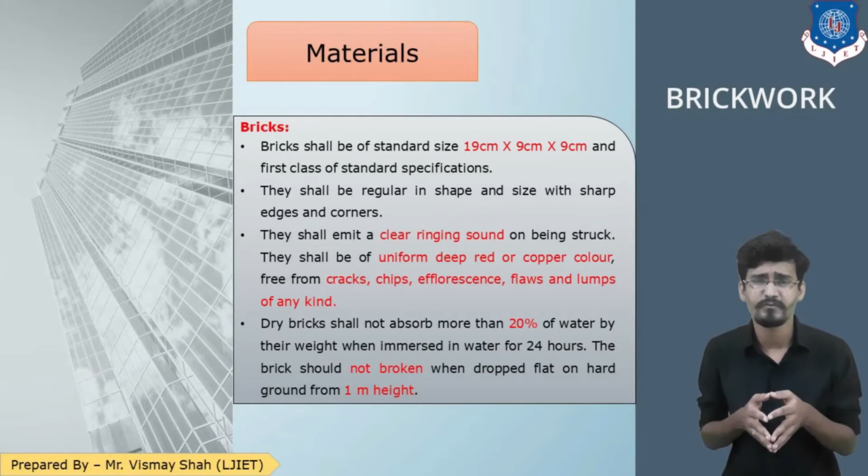The next material is cement. As we already discussed in reinforced cement concrete, the cement should conform to IS 269. It could be Portland cement, blast furnace slag cement, rapid hardening cement, and the general OPC cement should have a compressive strength of 17.5 N/mm². So that is about cement.

The next is fine aggregate. The fine aggregate shall conform to IS 383. It should be clean, sharp and hard angular grains passing through the IS sieve 4.75 mm. Also, it should be free from dirt, dust, vegetable and organic matter. Sea sand shall not be used; instead, river and pit sand shall be used. So that is about cement and sand.

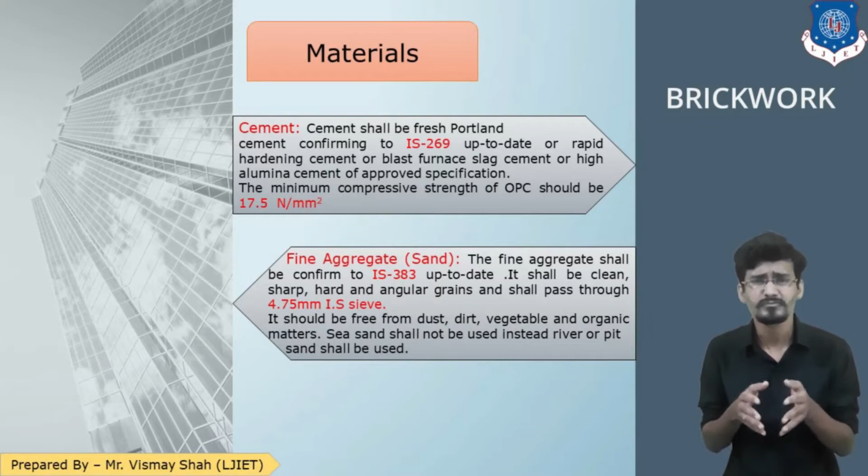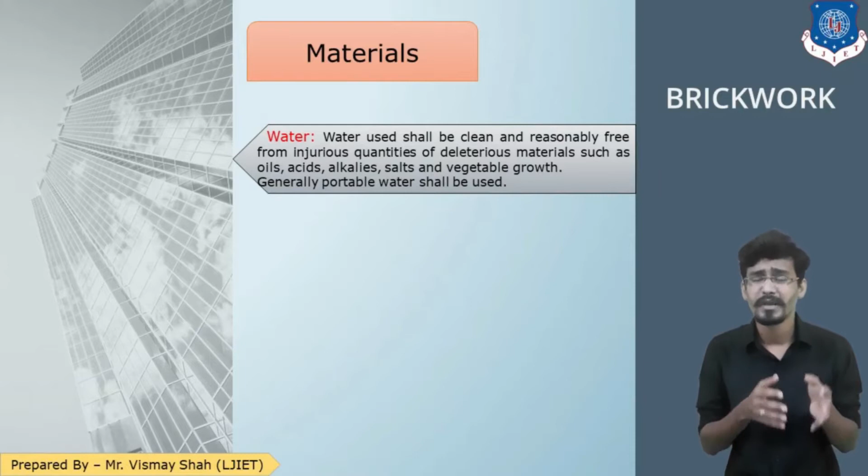And the last material is water. Water shall be reasonably clean and free from injurious impurities like alkalis, acids, oil, vegetable growth and other organic matter. Generally potable water is used for construction. So that was about the materials for the specification of the brickwork. Moving forward, the next is mortar.

The brickwork shall be done with the specified mortar, mixing the ingredients as per the cement mortar ratio given in the specification. In our case the ratio is 1:6, so 1 part of cement and 6 parts of sand. For cement, the unit of measurement shall be number of bags, counted using 0.035 cubic meter as the volume of 1 bag. So 50 kg equals 0.035 cubic meter. So if you have the quantity of brickwork, you can convert it into the number of bags of cement required.

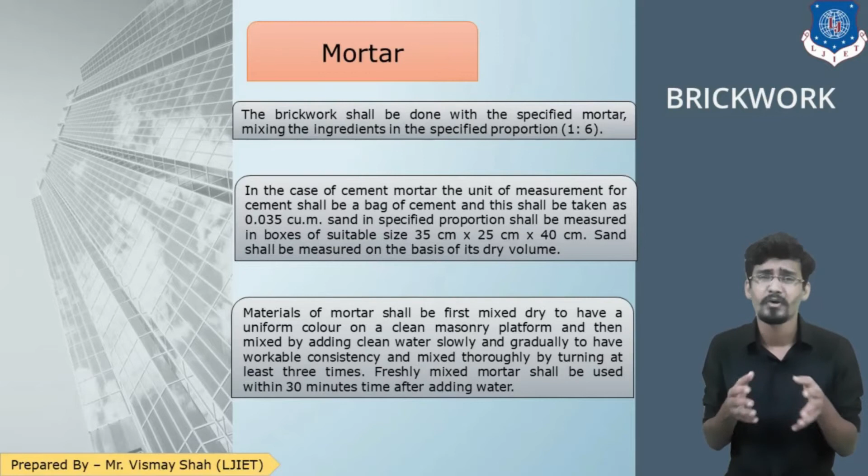I hope we are clear up to this point. Moving forward, soaking of bricks. So all the bricks which you are going to use in construction, they are to be soaked in the water for almost 12 hours before they are going to be used. So that is how the brick will absorb the water.

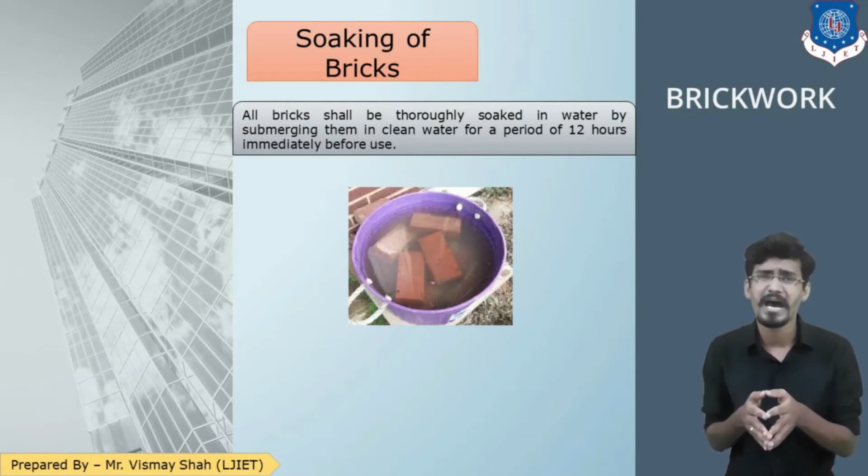Why is this needed? Think for a moment. Why do we need to soak the bricks in the water? Because if it is not done, the brick is going to absorb the water from the mortar, and if the water is absorbed from the mortar, it is going to be weak. Either they fall from the wall as well. So for that, the bricks are soaked in the water before they are used for the construction. Moving forward, the next is laying of bricks.

All the brickwork should be done in the English bond unless and until it is specified in another way. Also, every layer of the brick which the labor is placing should be truly horizontal and in plumb. Now what is plumb? Plumb is the vertical situation. For example, if this is my brick, then this should not be tilted. It should be in the perfect vertical plumb,

and every layer of the wall brick should be one on another. Also, the vertical joints, the joints between two bricks, in every layer should not come over one another. They should be placed at intermediate. So, for example, if this is the joint between two bricks, below that layer there should be no other joint. Why? Because if all the joints are at the same level, then if the load is coming from that point, your brick wall is going to fail. So I hope we are clear about that.

The bricks shall be laid with the frogs in upward direction, except only in the top layer where the frogs are going to be in the downward direction, because at the top layer you want a smooth finish. But in other layers of the brickwork, the frog should be upward, and the mortar thickness should be maximum of 6 mm, and joints should be fully filled with that mortar.

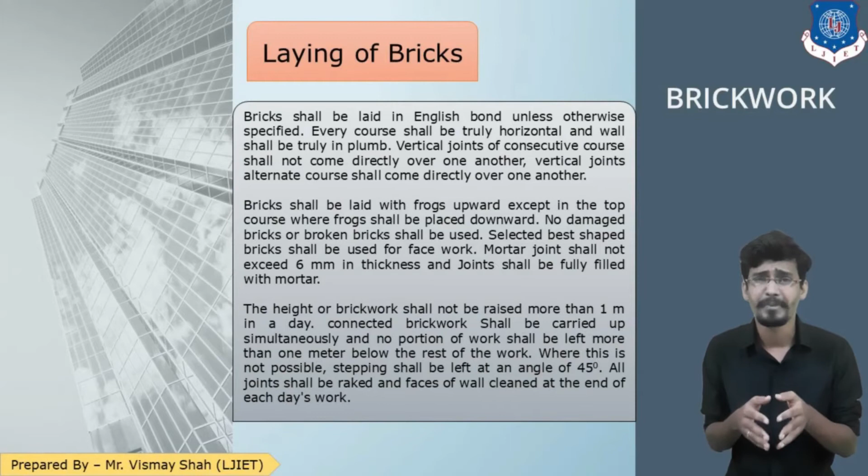Moving forward, the next is curing. The brickwork shall be cured for at least 10 days, and in this curing session, the brick walls are flooded with water at several intervals of the day.

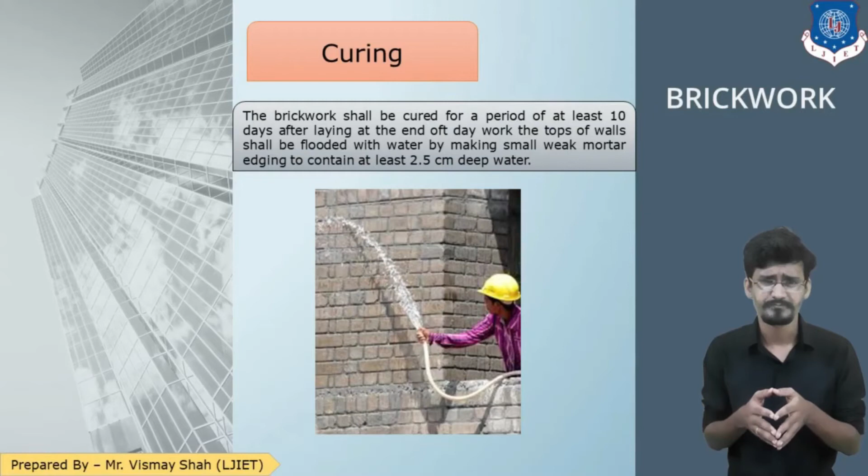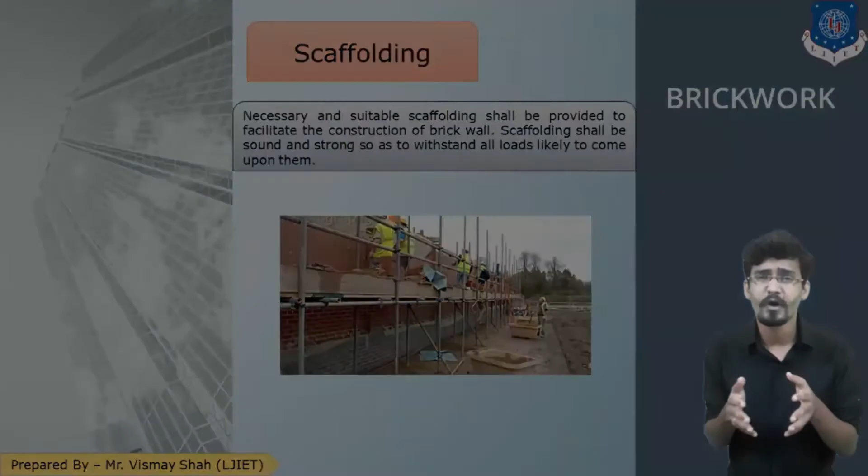In general site language, this is called khapeda. We have heard the terminology khapeda. Khapeda stands for a kind of platform where the labor can sit or stand and work on it. So moving forward, the last specification is measurement and rate.

The brickwork shall be measured in cubic meter. Different thicknesses of brickwork with different ratios of mortar shall be measured separately. Also, the brickwork shall be measured in multiples of half bricks, such as 10 centimeter, then 1 brick, that means 20 centimeter, 1.5 brick, that is 30 centimeter, and so on. So that should be measured in multiples of half bricks.

And the rates for this brickwork shall be inclusive of all the necessary scaffolding or temporary tools and plants which are required to complete the work. So that was about the specifications of the brickwork in cement mortar ratio 1:6.

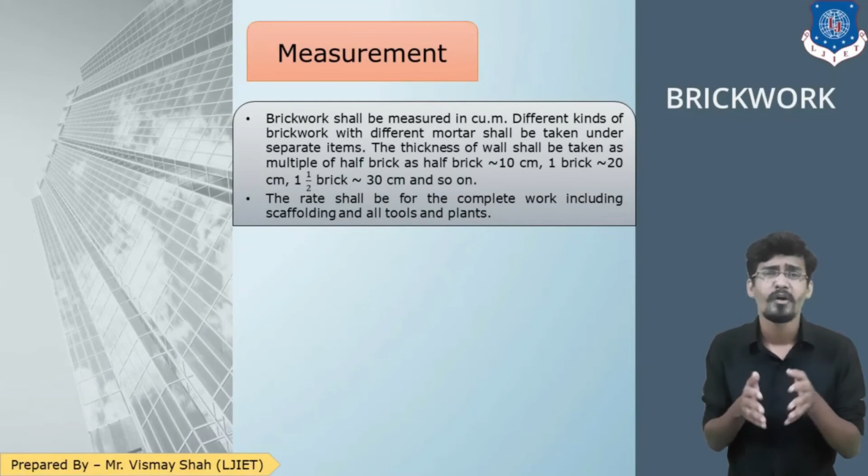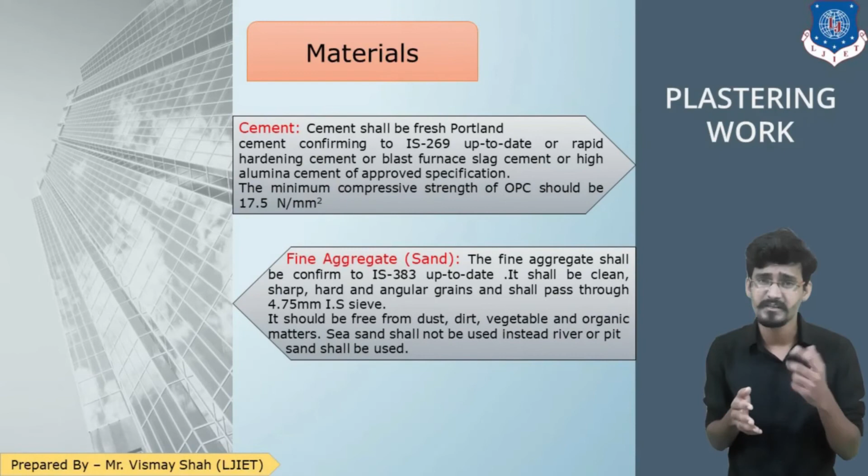Now let us look at the specification for plastering work. Again, for the plastering work, the first component is materials. Here only mortar is being used, so materials are cement, sand and water. We have already discussed cement, sand and water twice, in the previous session for RCC and just now for the brickwork. So the material specifications will be the same. I am not going to repeat it again. I hope we are clear with the material specification.

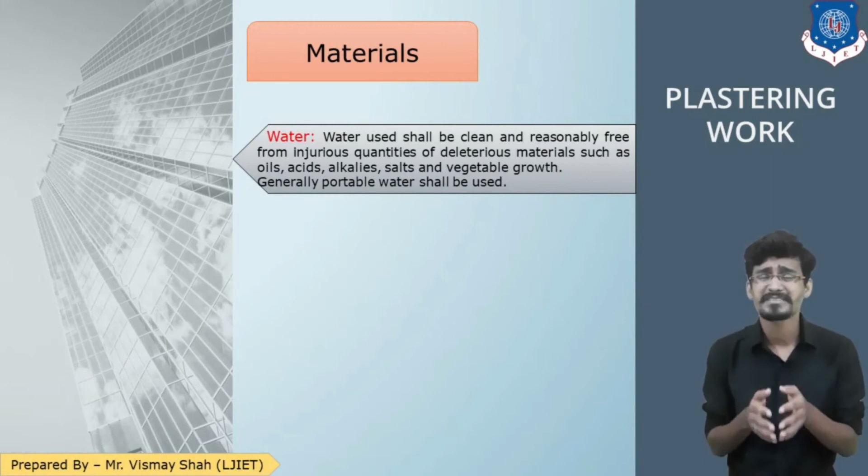So I am quickly moving forward. The next is mixing of mortar, or the preparation of the mortar. As we do in the mortar of the brickwork, we do the same in the mortar of the plastering work: first the ingredients for the preparation of the mortar are mixed in the dry state until we get a uniform color. Once we get a uniform color, the required quantity of water is then gradually added to that dry mix until we get a workable and plastic mix.

Again, the mortar which we use for the plastering work shall be used within 30 minutes of the preparation because of the initial setting time of the cement. So that was the preparation of the mortar.

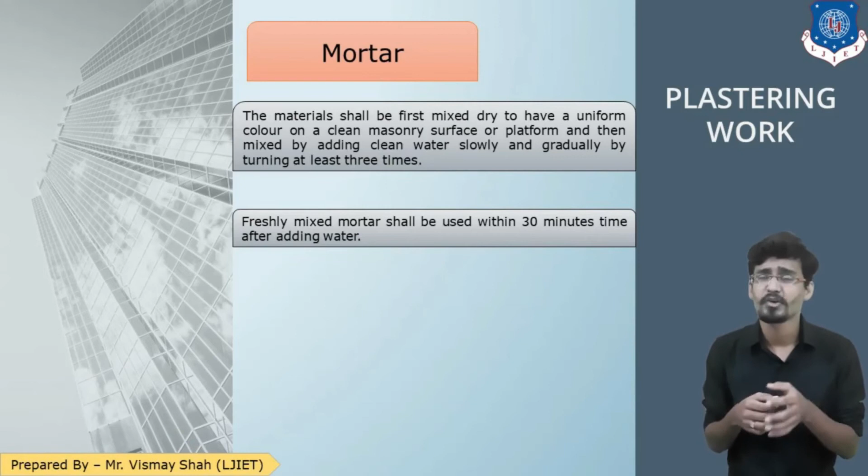Now moving forward, the next and very important: preparation of the surface. The surface of the wall should be clean, brushed and washed before the plastering work starts. Whenever you are doing the plastering work on the wall, that wall should be clean and washed with water, or a layer of water should be gently applied over that wall. In case of cement plaster over cement concrete surfaces, those surfaces should be slightly roughened and wetted or washed with water.

Students, you might have seen when there is an RCC column and the plaster is going to happen on that column, or there is an RCC slab and plaster is happening over that slab, there are small spots prepared by a laborer using a kind of hammer; that is known as tancha in site language. Tancha work is generally applied over the RCC layers, because you do the plaster many days after the RCC work, so the RCC surface may be slightly uneven, plus or minus. So to have a smooth finish, we do the tancha work.

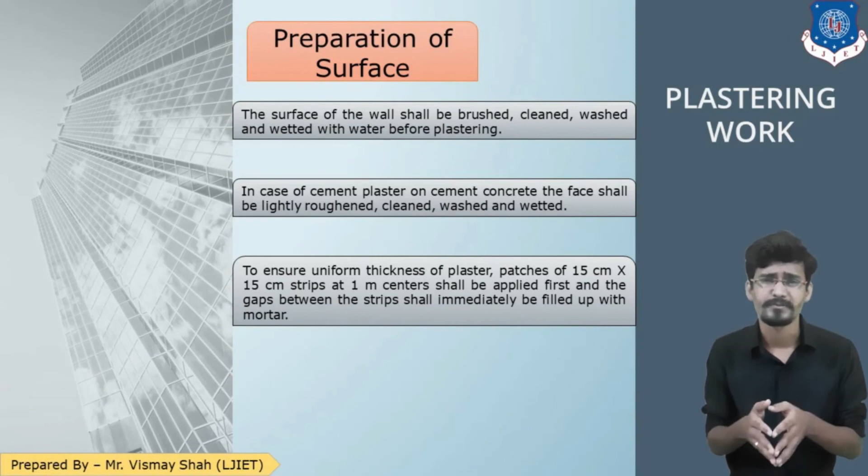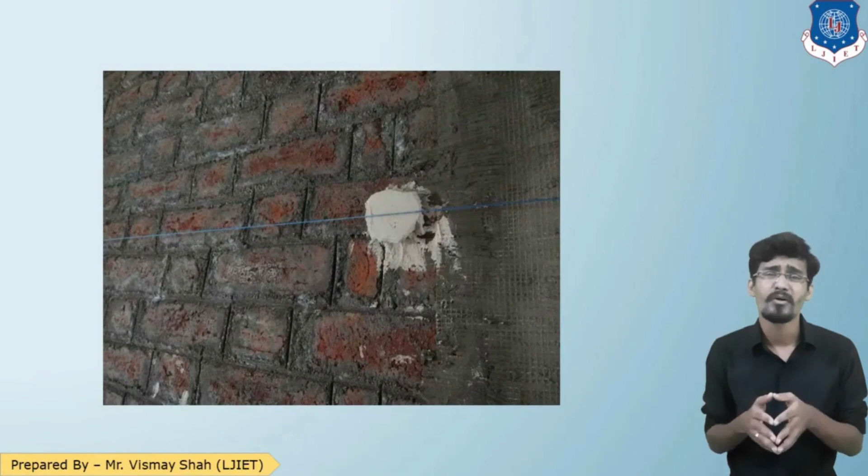Now, the next is laying of the mortar. First, the mortar shall be dashed and pressed over the surface and then brought to a smooth and uniform finish by use of a trowel. Students, you have seen that with a small tool, the plaster laborer puts the plaster on the wall, presses it, and then tries to spread that mortar over the surface.

After that, external plaster should be done from top to bottom, and internal plaster can be started in whatever part of your building is ready. The ceiling plaster should be completed before the wall plaster starts. So I hope we are clear about the laying concept of the plaster.

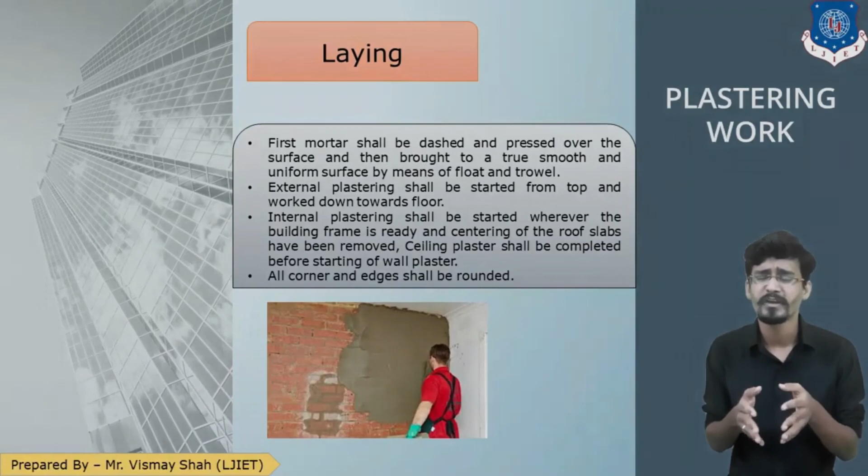Moving forward, the next is curing. The curing period for the plaster is 10 days, but take care that while watering or curing this plaster, no plaster work is damaged, and any defective plaster should be cut out in a rectangle and re-plastered with mortar or cement.

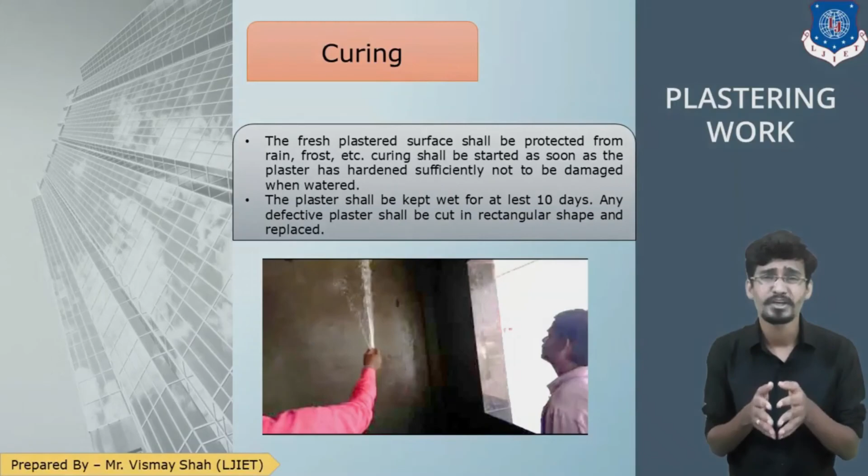And the last specification is measurement. Plastering should be measured in square meters, stating the proportion of the mortar and the thickness of the plaster. Plastering of walls, roofs and ceilings should be measured separately. The dimensions of the plastering work shall be taken before the plastering happens. So after completion of the brickwork, you must measure the dimensions where you are going to plaster. That is a must.

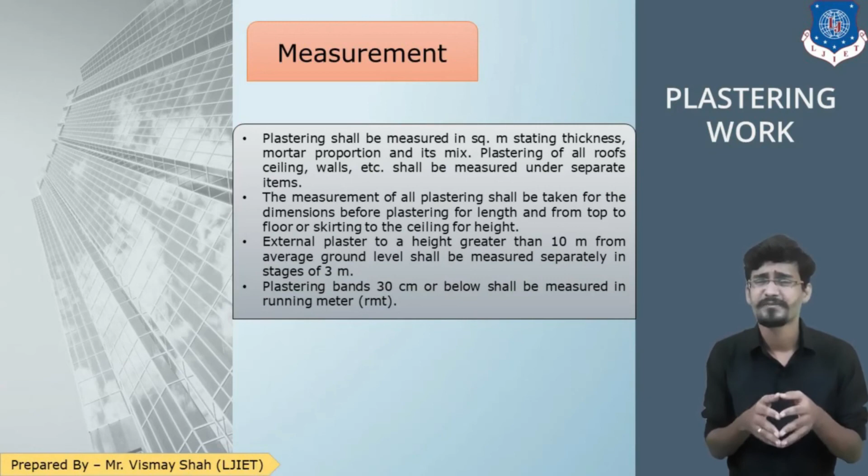External plaster to a height greater than 10 meters should be measured separately in stages of every 3 meters, and plastering bands of 30 centimeters or below should be measured in running meters. So I hope we are clear about the specifications of the plastering work. That was all for today's session. I hope we have learned it well.